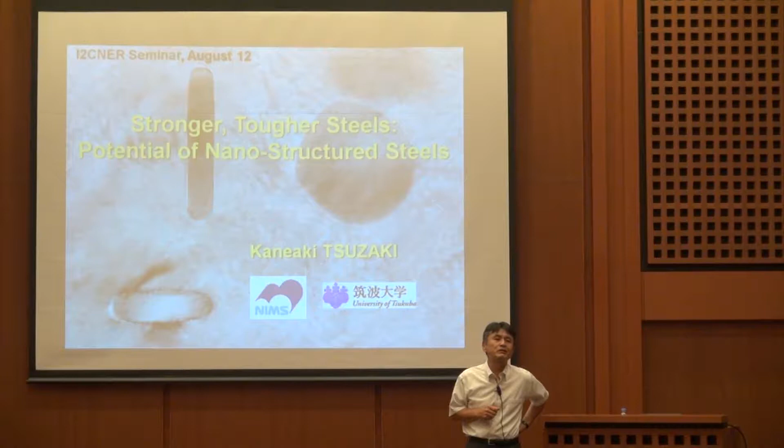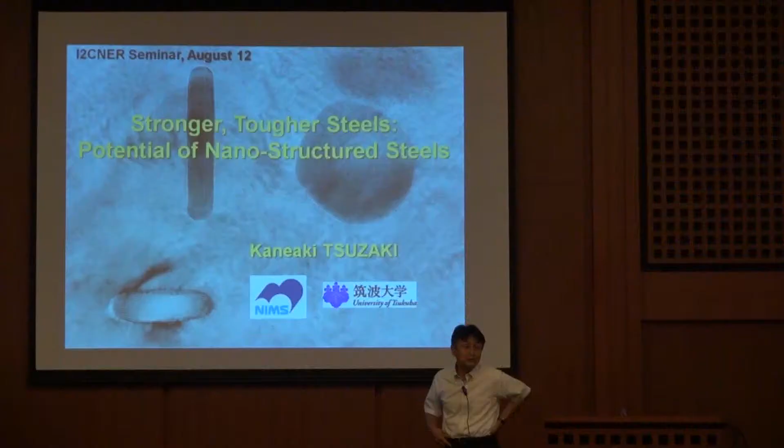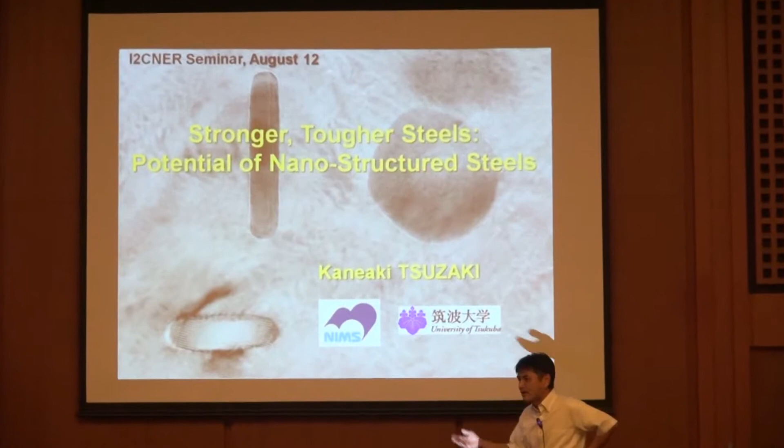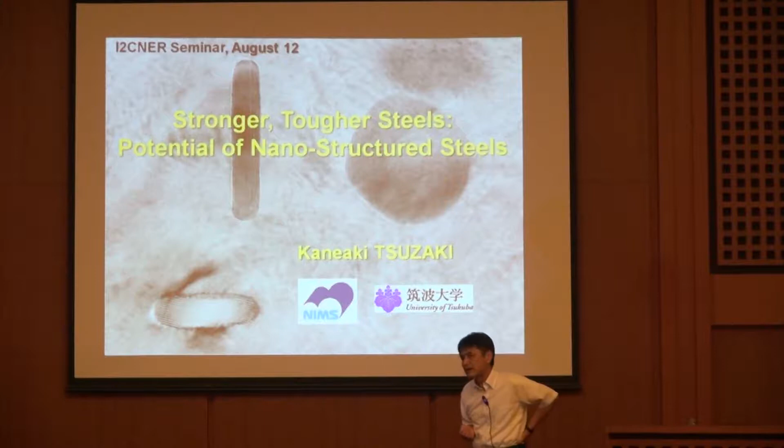When I start my talk, let me say something. I found three things in Fukuoka: changed, unchanged, and changing. Firstly, JR Hakata Station and the station building have been changed completely - I came to Fukuoka before, 1 year ago, and it's been completely changed, looks very fine. Secondly, it isn't changed - that is the taste of Japanese noodle, udon, at Daifuku Udon. There was a shop in Ekisaido Yokocho - the soup of the udon noodle was completely the same as when I was a high school student in Fukuoka. And thirdly, actually, it is changing - what is changing is Ito campus, Kyushu University, especially the research facility related to hydrogen research. The laboratory tour of 1.5 hours with Professor Matsuoka has strongly impressed me - what a fantastic research circumstance here. I have a strong jealousy of it, and I wonder how much research budget you obtain every year. I wouldn't like to know that because I don't want to get another jealousy of you.

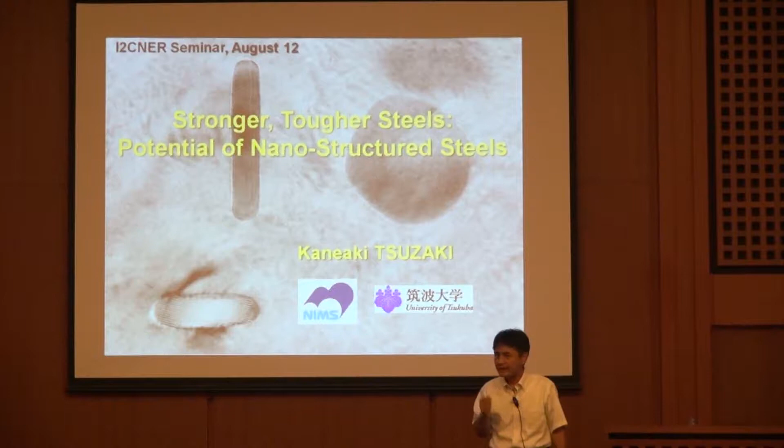Okay, anyhow, today's title is about steels. I'm afraid most people have a wrong impression about steel - that it is an old material. If there are some people here with such an impression, the aim of my talk today is to change it. And why? Steel has a very high potential yet to come with nanostructured material, microstructure I should say.

So, outline - you have the outline of today's slides, so I'll follow these slides. In the introduction, I will consider which property limits steel development. And then I'd like to introduce two topics in steel property - actually, two jumps in steel property.

One is a jump in the impact toughness of bulk steel with grain refinement. You may know grain refinement is now very popular in all kinds of materials, because grain refinement gives you a better property. But what kind of better property can you get in steel?

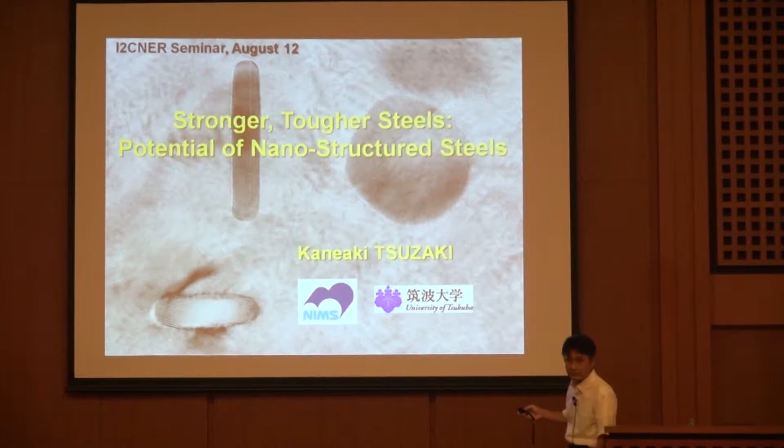Okay, and I may say something in a concluding remark, about low carbon society and sustainable society. If you consider the circumstance that you want to obtain, you need stronger steels and lighter steels. So there's the demand for low carbon society, is it okay? All right. So, but please remember this.

Few structural materials are limited by their strength. Rather, they are limited by their resistance to fracture. So then which property are steels limited by? The answer is toughness. So toughness is very important, not only for human beings, but also for steels, because we need safety and reliability for construction materials. So toughness is the key word.

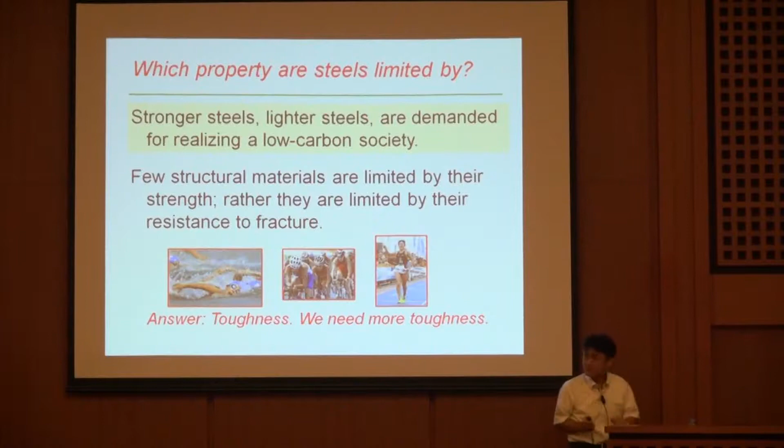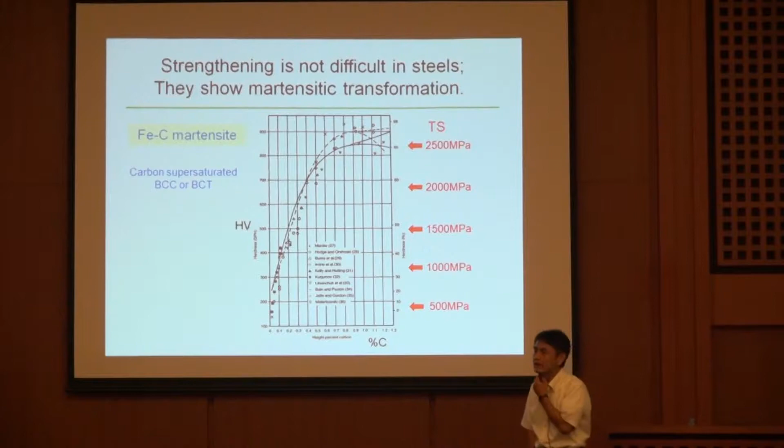However, good things and bad things. Drawbacks of high-strength steels, there are several: the toughness, hydrogen embrittlement, and ductility.

This figure shows one example of how the toughness decreases with the increasing yield strength for titanium alloy, low alloy steel, and high alloy steel, blue, pink, and brown bands. This is the absorbed energy, Charpy absorbed energy, impact energy at the ambient temperature.

Like this, even in the titanium alloy, that toughness, impact toughness, sharply decreases like this.

I'd like to say I was in charge of the ultra steel project. It started in 1997, where there was a very high level of research target in property. So one of the targets was the toughening of low alloy steel with the yield strength of 1800 megapascal.

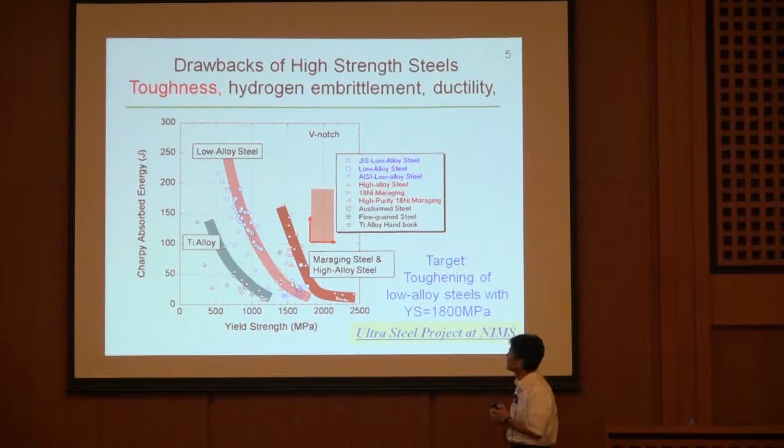Let us look at the target on this figure. 1800 megapascal is here, and toughening here. Professor Matsuoka, what is the limit? The necessary impact energy usually for engineering material.

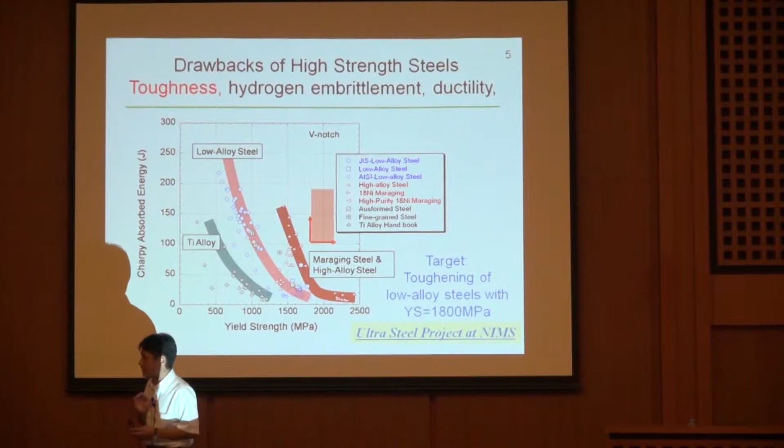Some people said 70 joule, at minus 20 degrees centigrade. I discussed with several researchers at the time, and their demand for impact energy was 100 joule for safety. So then the target becomes like this.

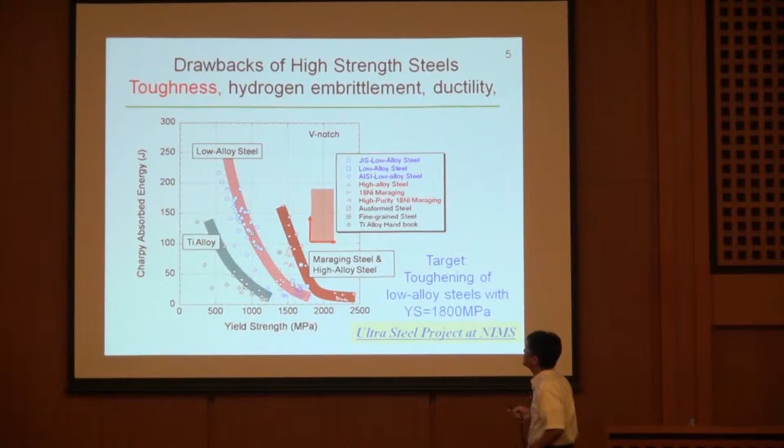Then you can find no material exists to meet this target. Steel, material steel has a long history, but never produced this mechanical property. Then this is the challenge.

And at that time, people worried about the addition of too much alloying content, such as cobalt, nickel. Those are very, very expensive. So then low alloy steel would be another key factor.

Today, I tell you about the jump of a property from this to this. The chemical composition isn't changed. This chemical composition shows this value with the conventional heat treatment. However, this property increased up to here with the special processing that produces a new type of microstructure.

So you know there are many things. I think most people know that grain refinement makes a material tougher. However, I should say it isn't enough. Partly yes, but partly not.

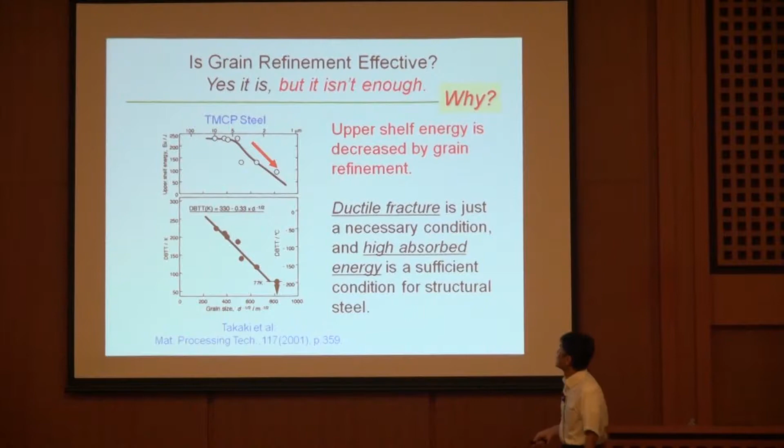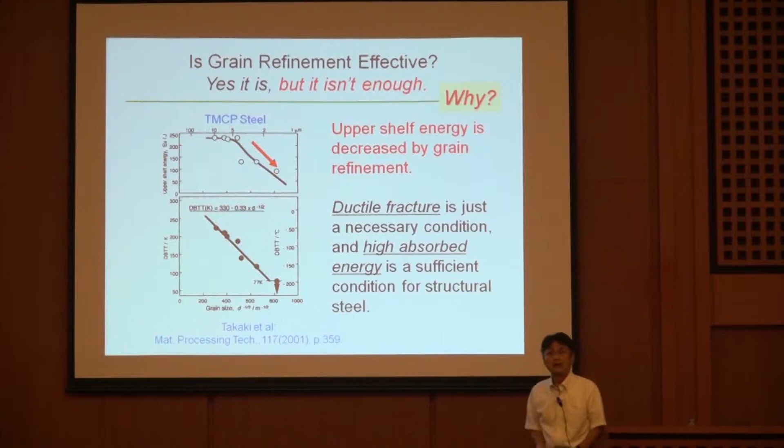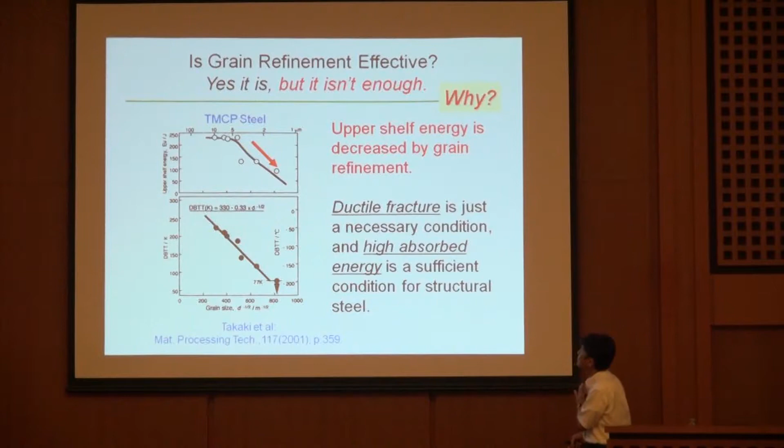So what I want to say is the upper shelf energy is decreased by grain refinement. So then ductile fracture is just a necessary condition. I need absorbed energy higher than 100 joule. So then I should say high absorbed energy is a sufficient condition for structural steels. So then we discussed this again and again, and there was one good hint.

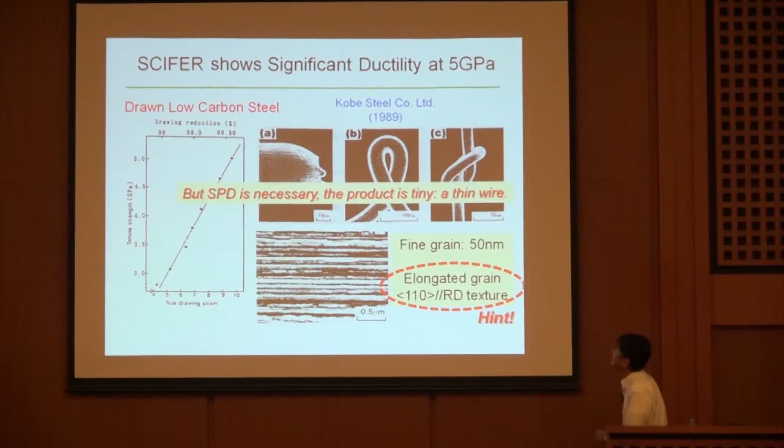The 110 BCC plane is parallel to RD, the rolling direction. I thought, or actually my young colleague thought, this elongated grain structure along with the fine grain size would be a hint to obtain high ductility. But as you can see here, severe plastic deformation is necessary.

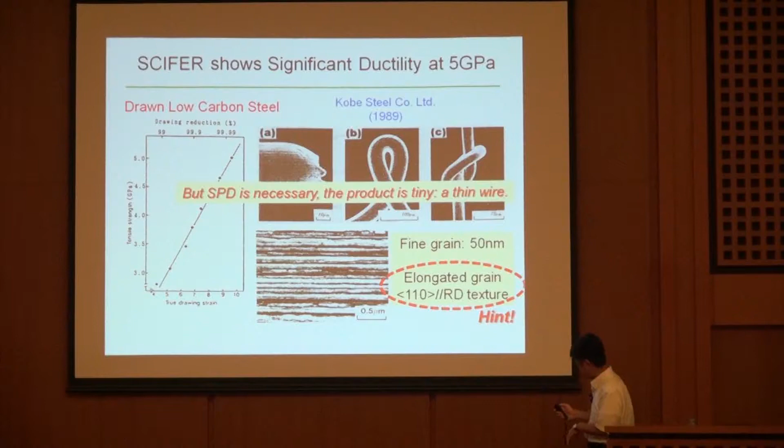The product size is very tiny, less than 100 micrometers in diameter. So it's okay for wire or fishing line, but we cannot produce any engineering material with this processing condition. So then, how do we realize an ultra-fine elongated grain structure in a large-scale product? It's another challenge, I think.

Once you can get a possible or attractive microstructure, you have to consider how to produce it—you have to consider the processing. You have to consider the size of the product and the cost of the product. Those are the conditions in this case.

But we wouldn't like to take the severe plastic deformation approach. So then another hint is here: this shows how the microstructure changes with the total strain when you change the initial microstructure before deformation.

One is conventional ferrite with a coarse grain size. The other is martensite with a very small grain size, even in the as-quenched condition. As you can see, the tendency of grain refinement—its kinetics—is much faster in martensite than ferrite. This means when the initial microstructure grain size is finer, the kinetics is faster, so only a strain of 2 is necessary to produce this fine grain elongated structure.

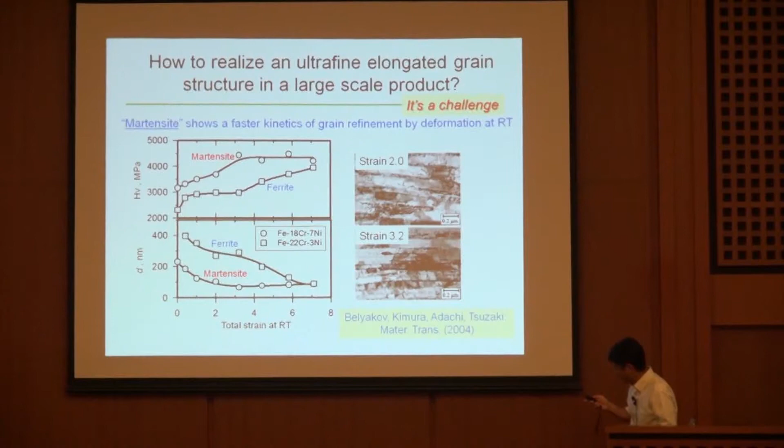So then we decided on this chemical composition of steel and processing. The chemical composition is 0.4 carbon, medium carbon content, 2 silicon, 1 chrome, and 1 moly. This is necessary to obtain a yield strength of 1800 megapascals.

And for the process, it's rather simple. We did quenching to produce martensite, but martensite is too hard to deform at ambient temperature. So then we heated it up to 500 degrees Celsius, where ferrite and cementite are stable phases. Actually, this tempered martensite is deformed at this temperature with a total of 80% reduction, then air cooled.

With this process, we can get a bar sample 2 centimeters square, like that. And I should say this deformation of martensite has been called tempforming by Professor Imao Tamura, who was my teacher at the university. He named this in 1963.

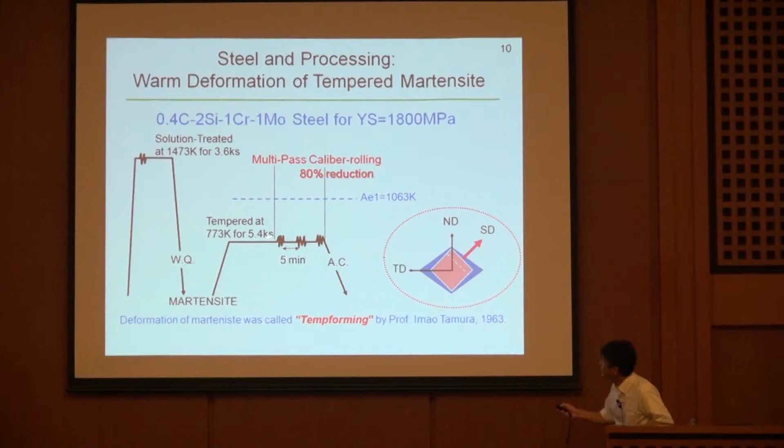So what kind of property or microstructure is obtained? Firstly, this is the microstructure before deformation. You can see this is the conventional microstructure of martensite, quenched martensite of medium carbon steels.

At the higher temperature, where the steel is austenite in phase, the grain size is like this. But during quenching, the steel undergoes martensitic transformation, and then you can get many kinds of boundaries in it. As you can see, this is 10 micrometers.

Then the purple and green grains are smaller than 5 micrometers. So originally, martensite structure is a fine-grained steel even in the as-quenched condition.

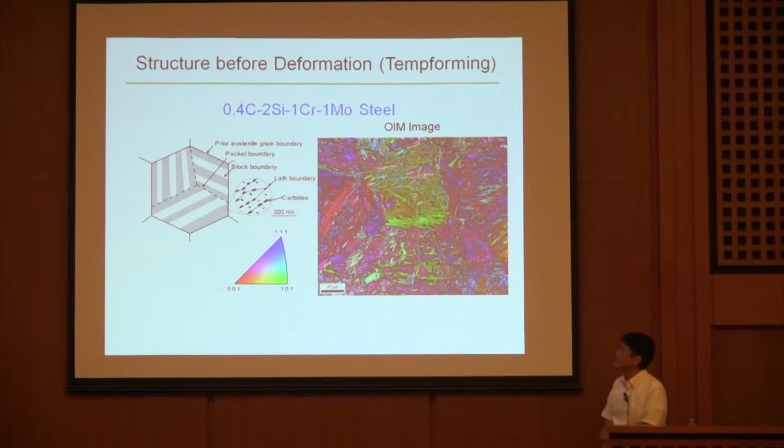This microstructure is similar to that of the SCIFER I introduced in the previous slide. Now, mechanical properties—first, the tensile property.

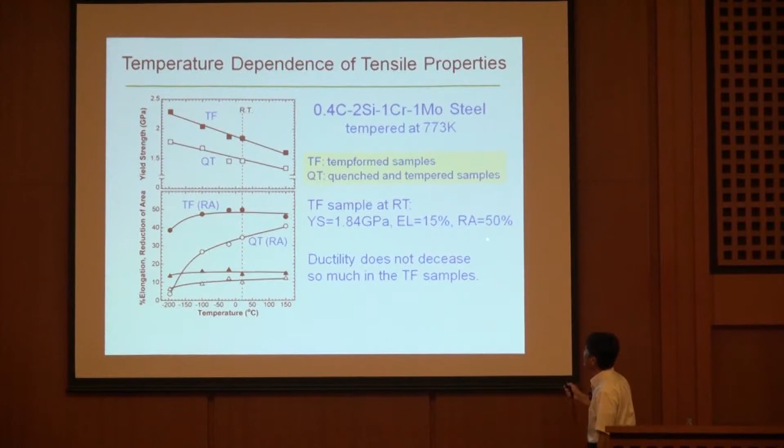Firstly, we have to check the yield strength. Yield strength here is 1.84 gigapascal, a little bit higher than the target condition of 1.8 gigapascal. This is the elongation and the reduction in area. And what was the toughness? How was the toughness? Here is the data.

We are so surprised when we look at this data. But firstly, we discussed this jump. When you look at ductility, the changes are just like here, so it isn't enough to explain this large jump in impact energy by this ductility alone.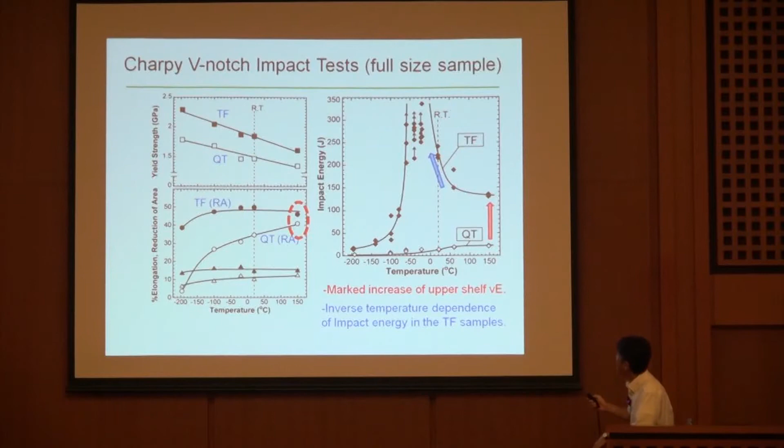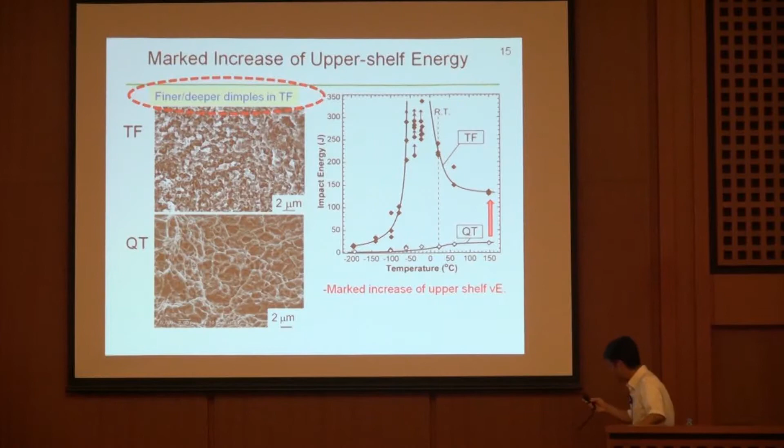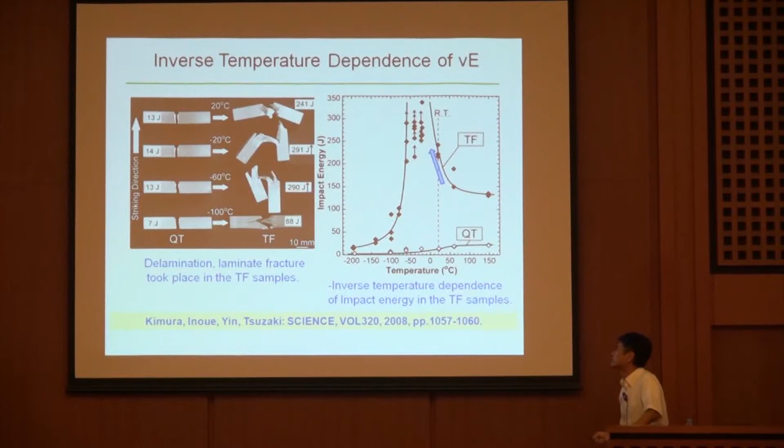Why does this inverse increase occur? Maybe it's associated with this delamination, because delamination more often occurs as the temperature decreases, like this. And then another deformation fracture mode is seen at minus 100 degrees C.

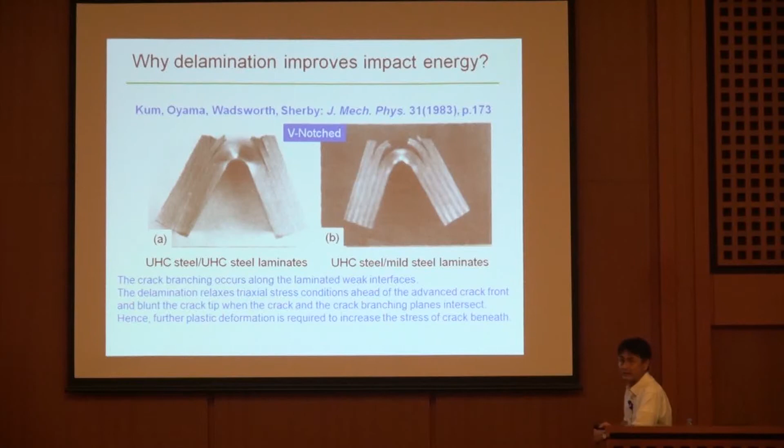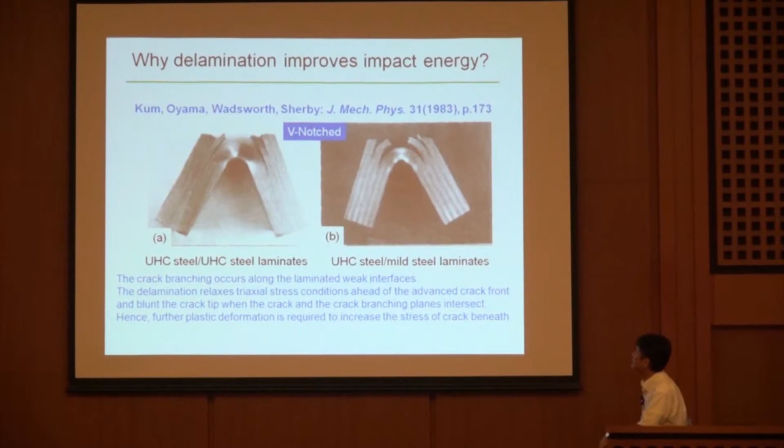You may ask why delamination improves impact energy. It has been proposed by the research group of Professor Sherby in 1983 with laminated steel sheets like this—you can see the delamination fracture like this. Clearly, crack branching occurs along the laminated weak interfaces. The delamination relaxes triaxial stress conditions ahead of the advancing crack front and blunts the crack tip when the crack and the crack branching plane intersect. Then further plastic deformation is required to increase the stress at the crack beneath. This is one of the reasons why delamination improves the impact energy.

So delamination requires weak planes normal to the striking direction, RD. What are the weak planes in the temp-formed sample? This is the microstructure for the transverse plane and the longitudinal plane with orientation mapping in different colors. When you look at this strong 110 RD deformation texture, there are lots of 100 cleavage planes along the RD that are normal to the striking direction. So the 100 plane is the weak plane in the BCC steel, and it would be the plane for delamination.

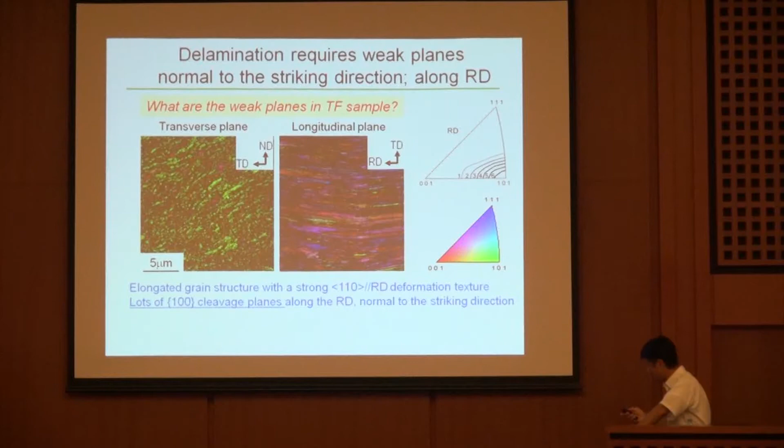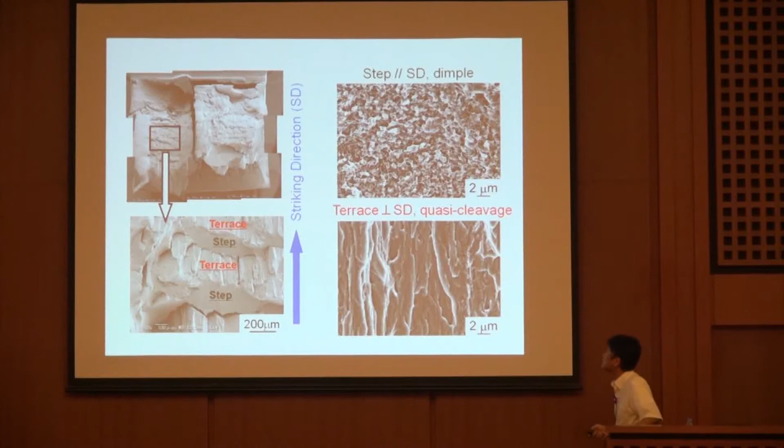To check it, we observed the fractography. The fractography shows here some zigzag features, step and terrace. The step and terrace is parallel to the rolling direction, which is the longitudinal direction of the sample. The step plane is parallel to the crack advancing or striking direction. On the step, you can see dimples like this. However, on the terrace, a quasi-cleavage fracture mode has been observed—it looks like cleavage fracture on the 100 plane. So we believe the 100 cleavage fracture causes the delamination fracture in this sample.

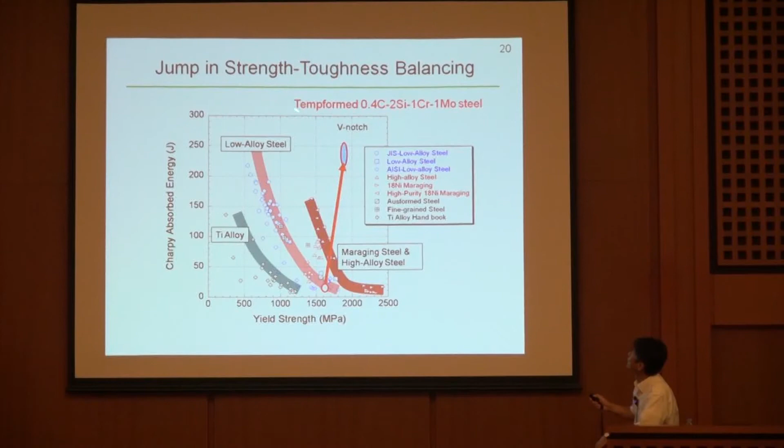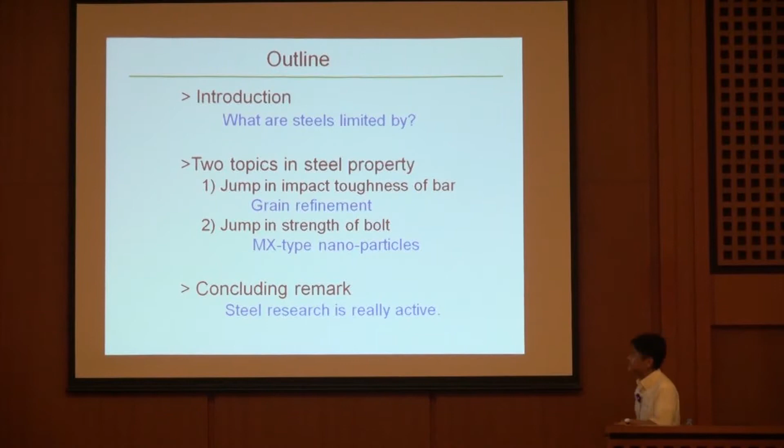So we found this jump from here to here with this medium carbon low alloy steel by processing tempforming, which produces the ultrafine elongated grain structure with a particular texture. So the next topic is the jump in the strength of a bolt.

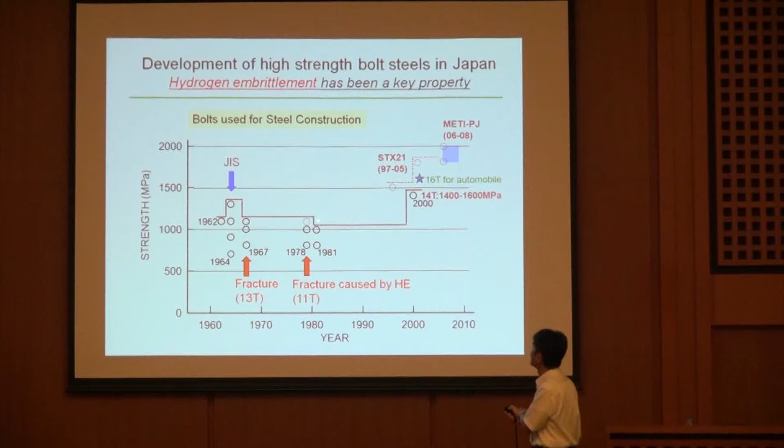Please look at this. This shows the strength level of high strength bolt for steel construction. Up to 1997, the strength level stayed around 1 gigapascal with no change. This is because of the problem of hydrogen embrittlement. We had severe fracture accidents at this time and this time. So, to ensure enough safety, the strength level of a bolt has been kept lower than 1100 megapascal.

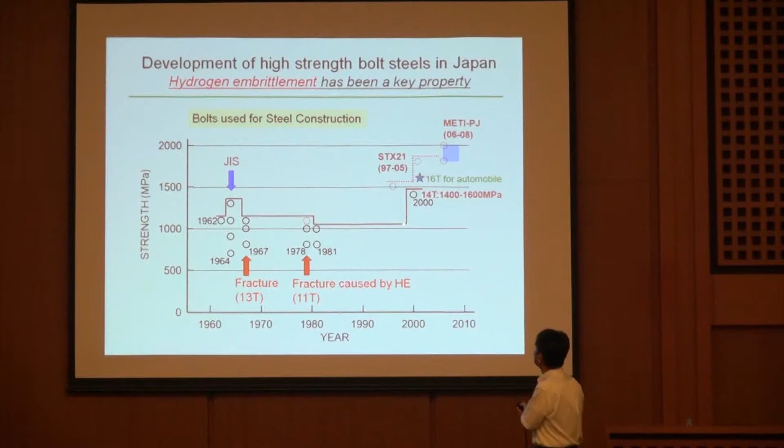However, because of the strong demand for light construction with lighter materials, here is a jump. Actually, this is pulled by automobile products, automobile bolts, like this.

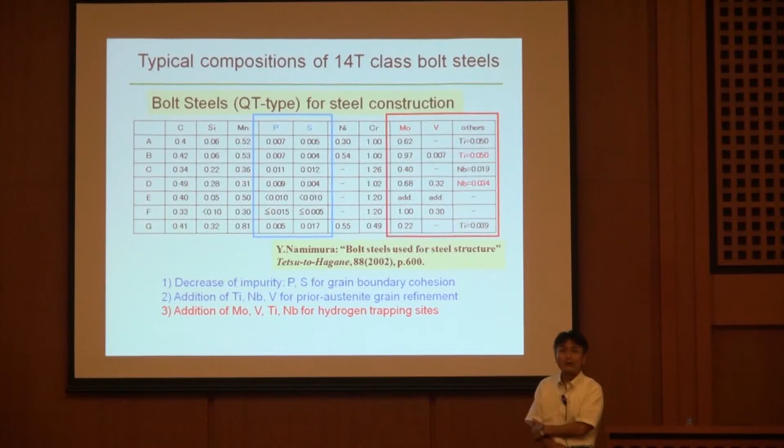And this jump is associated with the addition of alloying elements such as molybdenum, vanadium, titanium, and niobium, and with low concentration of impurities like phosphorus and sulfur.

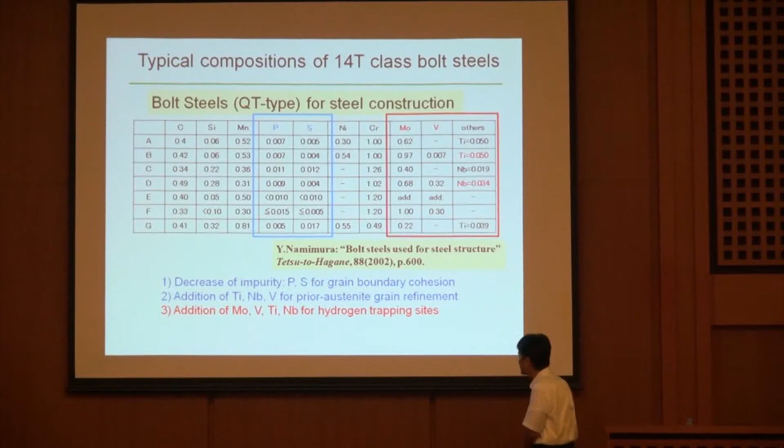So this is a list of the characteristics of this new steel, this new bolt steel: decrease of impurity, addition of titanium, niobium, and vanadium for prior austenite grain refinement, addition of these for hydrogen trapping sites, and hydrogen embrittlement resistance via MX type carbides.

Fracture from hydrogen embrittlement of high strength steel, where the strength level is higher than 1100 megapascal, occurs along the grain boundary because hydrogen segregation reduces the decohesion energy. MX type carbides act as a hydrogen trapping site and reduce the hydrogen concentration on the grain boundary.

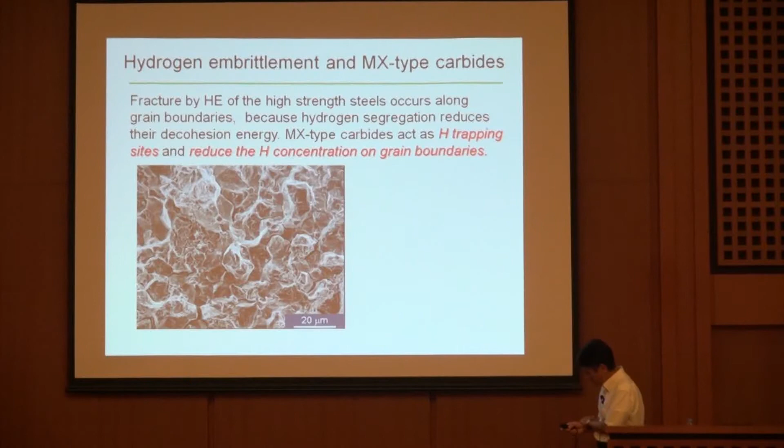So the target of the Ultra Steel project at NIMS was to make clear the function of MX type carbide as a hydrogen trapping site. We studied the case of three kinds of carbide.

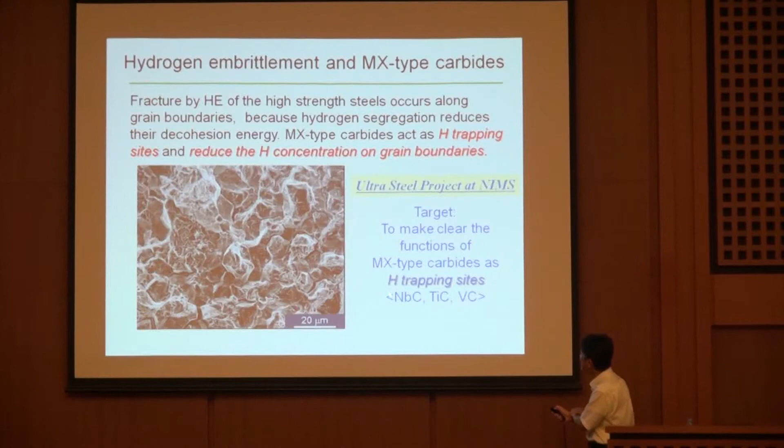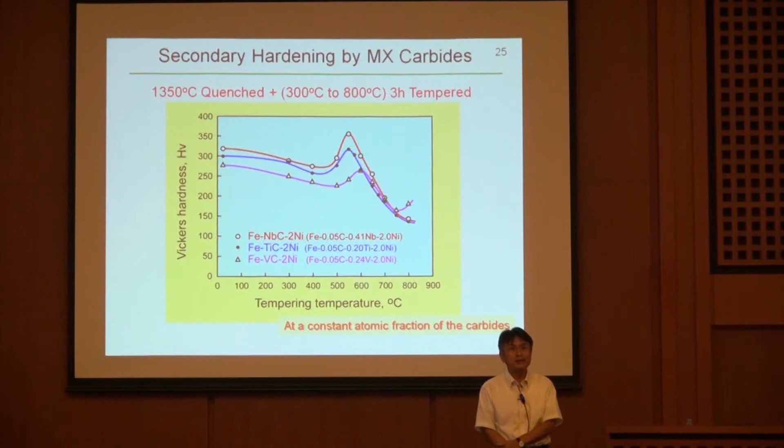Firstly, MX carbide is very famous for secondary hardening. This is something you studied in classroom: hardness changes with tempering temperature. Without these special carbides, hardness decreases like this with increasing tempering temperature. However, there is an increase here when the tempering temperature is around 600 degrees C.

This has been observed even in this case. I selected the model steel's chemical composition because our aim is to clarify the mechanism. I have to say these are not engineering steels in this case, okay, model steels. The chemical composition has been chosen to obtain a constant atomic fraction of carbide.

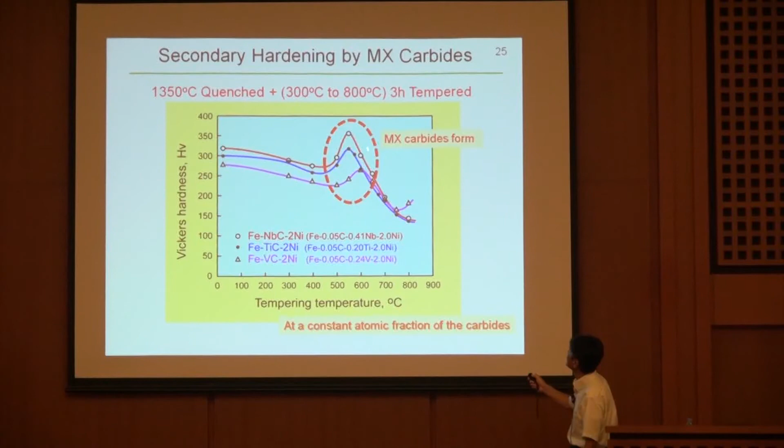And here, when secondary hardening occurred, you have MX type carbides. Then I checked the hydrogen trapping capability. This is a little bit complicated, let me explain. This is the hydrogen content, and this is the condition of tempering temperature. Let's go back to the figure - this is the same, tempering temperature, the heat treatment condition. What we've done is temper the martensite, then charge it with hydrogen at a constant condition after the tempering.

The absorbed hydrogen was measured, and this is the result. Absorbed hydrogen is almost zero when the tempering temperature is lower than 500 degrees C, where MX carbide does not form. But when MX carbide exists in the steel, this hydrogen concentration goes up like this, then decreases again like this. The hydrogen trapping capacity peak level is highest in niobium carbide, then titanium, and smallest in the case of vanadium carbide.

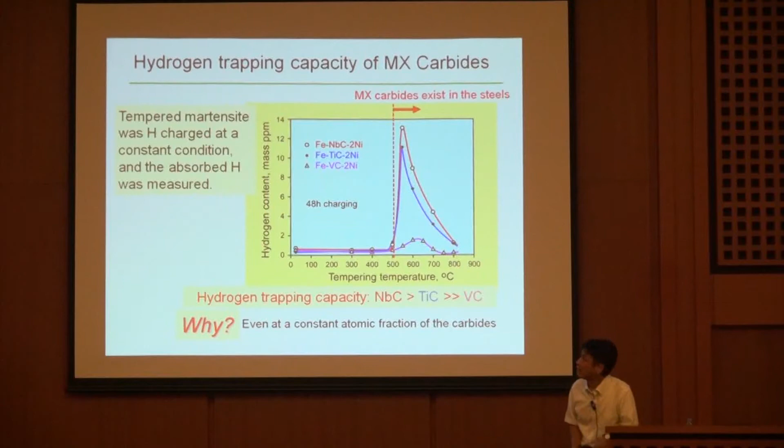We did many things to find out this reason, and the result I show you today is a part of that. I believe this is the essence of the reason.

What we considered is the character of MX type carbide at the atomic scale. If you're familiar with interface morphology of carbides - coherent interface, semi-coherent interface, random interface, something like that - in our case, the interface isn't fully coherent, but semi-coherent. Semi-coherent interface means there are interface dislocations every particular distance, like this. In this case of titanium carbide, the interface dislocation exists every 4.2 nanometers to compensate the difference in lattice misfit of 6.8%. This is a feature of the carbide interface.

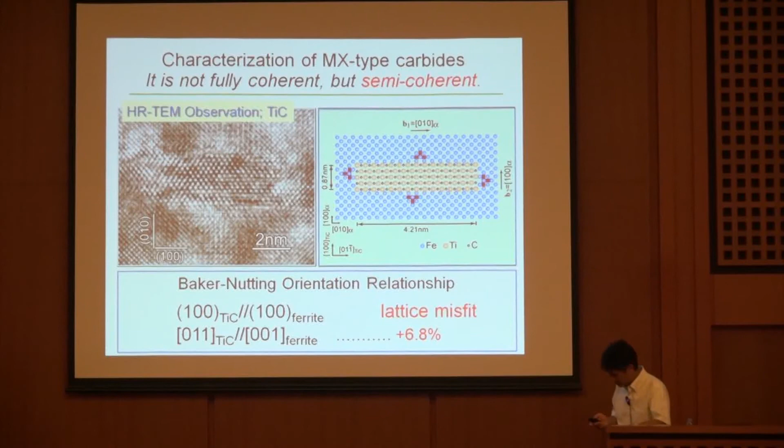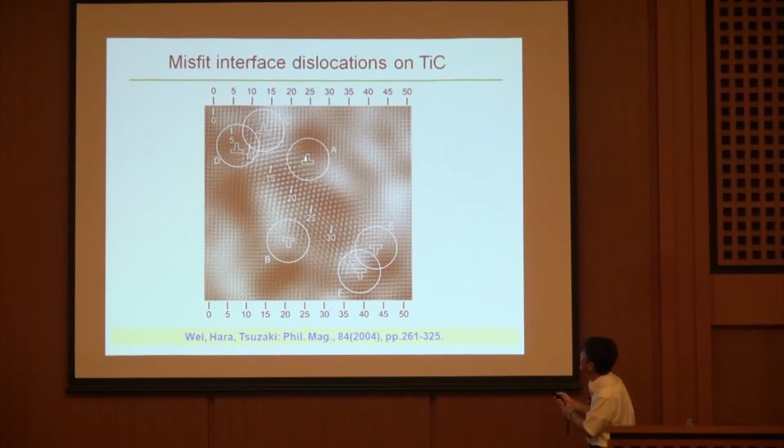And this kind of interface dislocation will be more clear in this photo. If you have time, you can count the line of atoms, then an extra line would be found like this.

So then we discussed the possible hydrogen trapping sites for semi-coherent MX carbide. There would be several candidates, from the misfit dislocation core to carbon vacancy, like this.

Somewhere in a normal lattice site here, but the possible trapping site for hydrogen - I would like to say the misfit dislocation core is the key for this particular case. Why?

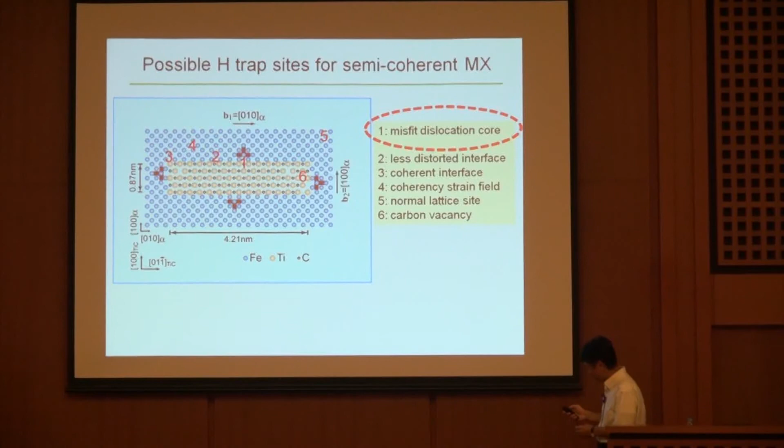Please look at your atomic configuration around the misfit dislocation at the interface. You can find the large distorted region along the misfit dislocation core, like this. This is essentially an octahedral interstitial site here. So this is the free volume, large free volume, and hydrogen likes free volume, because when you have a hydrogen atom in the interstitial site in the matrix, you get expansion of the lattice.

So hydrogen likes free volume. So we found it would be a possible trapping site. Two years later, or I should say last year, it has been found in atom probe research that the actual trapping site is here. But at that time we couldn't use the 3D atom probe, so this is what we did instead.

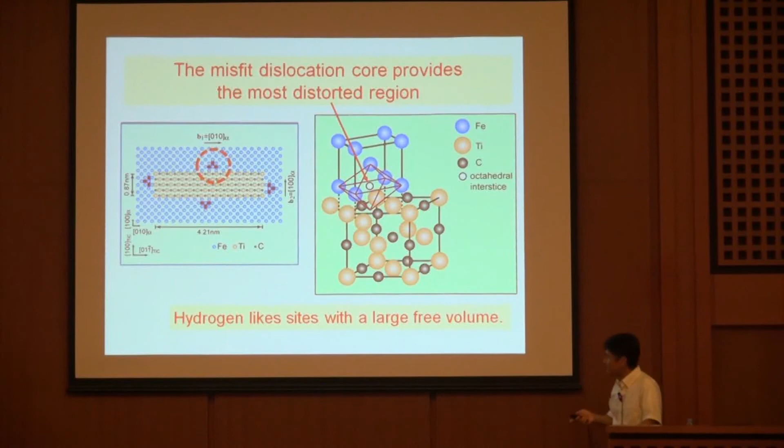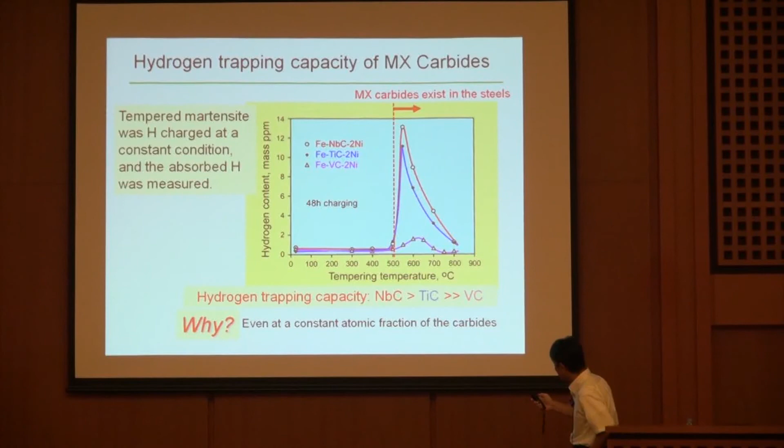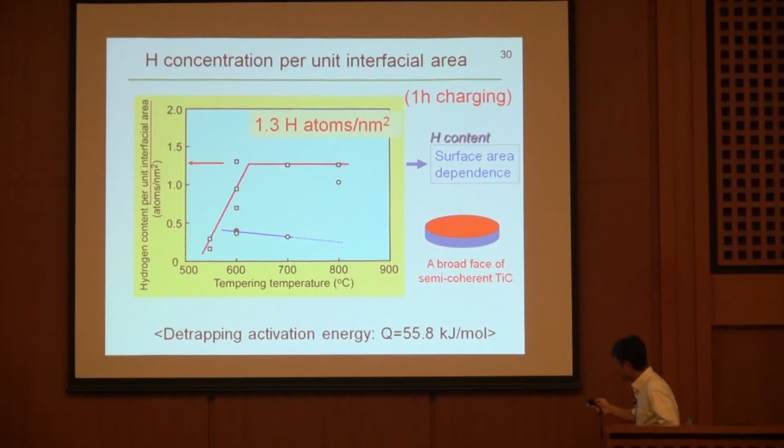And also we found the detrapping activation energy is like this. What's the meaning of this? It should be related to the sites of the hydrogen trapping site.

So this is a picture of the interface viewed from the top. This is the array of misfit dislocations. And what we found is a 0.87 nanometer spacing along the misfit dislocation for 1.3 hydrogen atoms per square nanometer. This spacing is very close to the lattice distance along the misfit dislocation. So this is a lucky coincidence between the two. We believed it must be the hydrogen trapping site.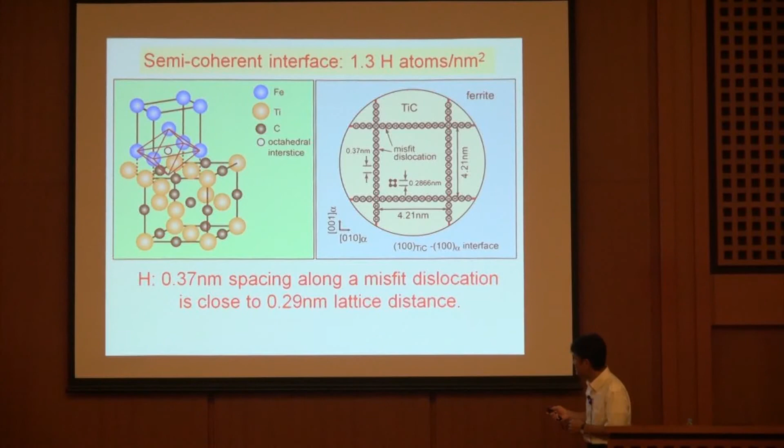So then we considered further - trapping capacity would be related to the misfit dislocation density. This is the microstructure feature of three kinds of steel with different niobium carbide, titanium carbide, and vanadium carbide, at a given temperature condition like this. You can see different kinds of shape and morphology.

And if you look at the misfit, it is larger in the niobium carbide and smallest in the vanadium carbide. Then the density of misfit dislocation is highest in the case of niobium carbide. That must be the reason why the hydrogen capacity changes in this order.

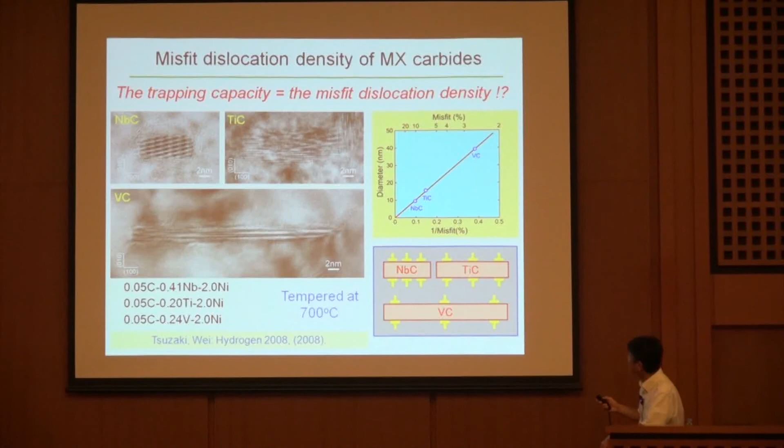So hydrogen trapping capacity was like this, and the reason for this tendency would be that the dislocation causes a possible hydrogen trapping site, and the higher trapping capacity of niobium carbide is caused by a high density of misfit.

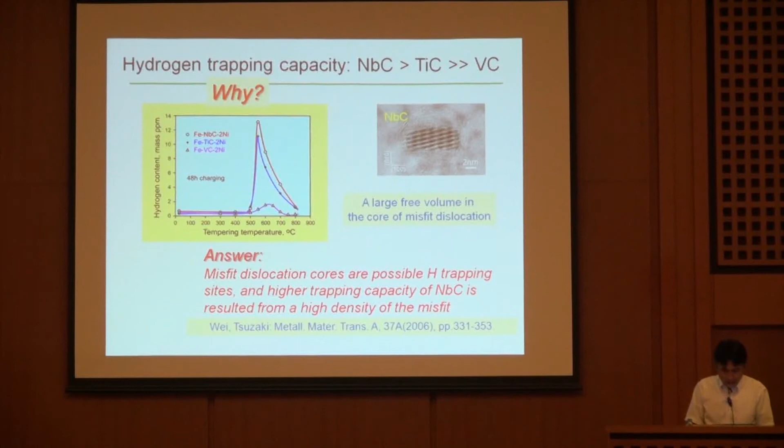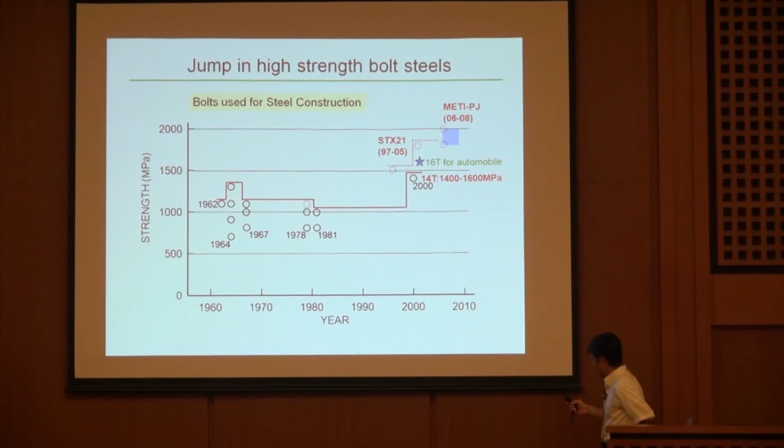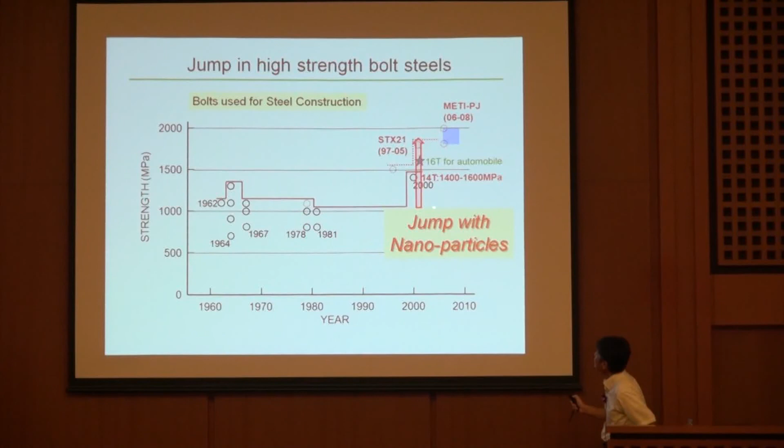So what we did with this is to support this jump that has really been done with the nanoparticles.

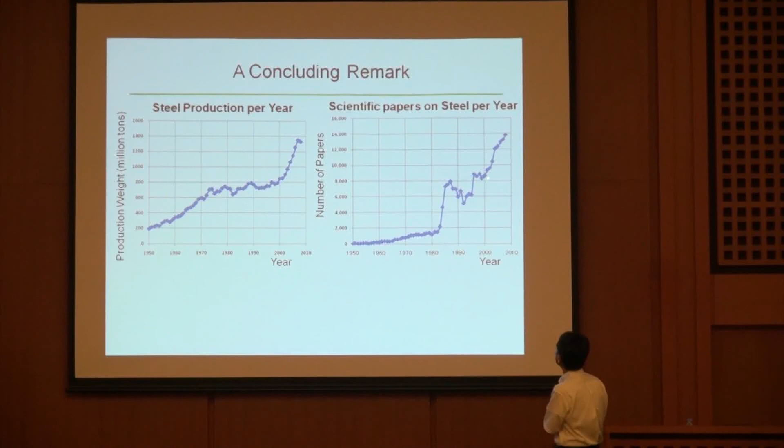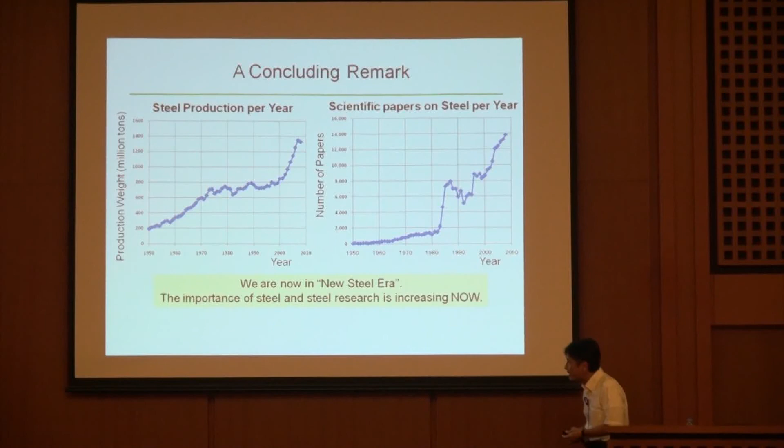So I introduced you to two jumps, and it's time to conclude my talk today. What I want to say is that steel research is really active even now. When you look at steel production per year, it is again increasing after a steady state of 30 years. And scientific papers on steel per year are also increasing like this. With this current situation, I would like to say we are now in a new steel era, and the importance of steel and steel research is increasing now.

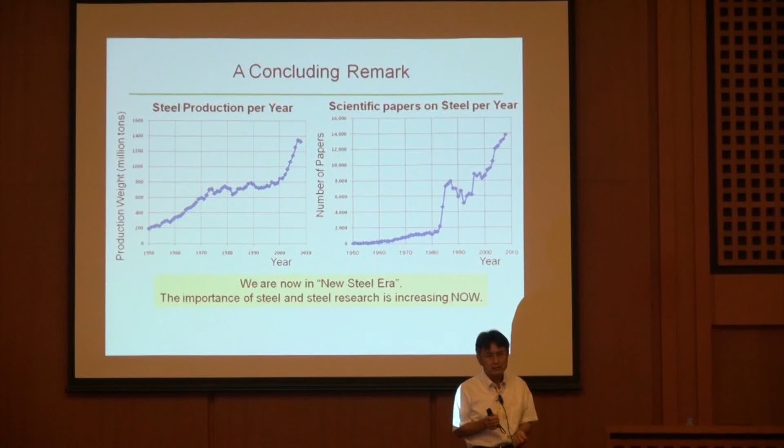It is apparent because when circumstances change, new demand for structural materials comes up, like the hydrogen society giving us new conditions for steel construction. So then we need research, not only engineering but also science. So this is my concluding remark today.